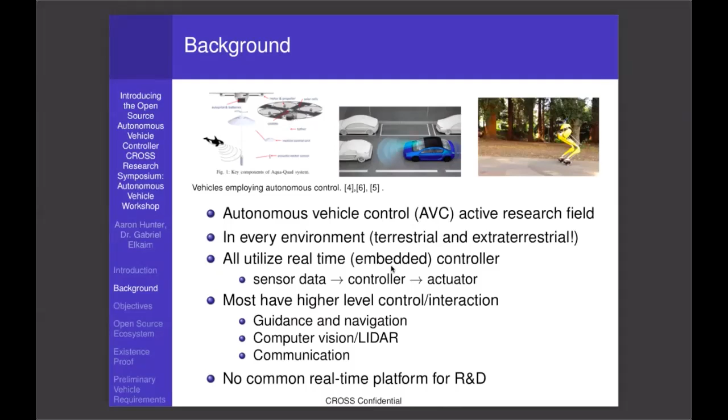So the proposal, therefore, is that we want to develop an open source, real-time embedded controller for autonomous vehicle research and development. In particular, we want this controller to be vehicle agnostic, that is, we want it to be useful for a larger number of vehicles than just a single class of vehicle, like an automobile or a quadcopter, but one that can be applicable to almost any real-time autonomous vehicle.

And equally important, this controller will automate the data pipeline to allow seamless integration to a single or multiple external processors, enabling those computationally expensive operations I just discussed, such as computer vision, guidance, navigation, model predictive control, you name it.

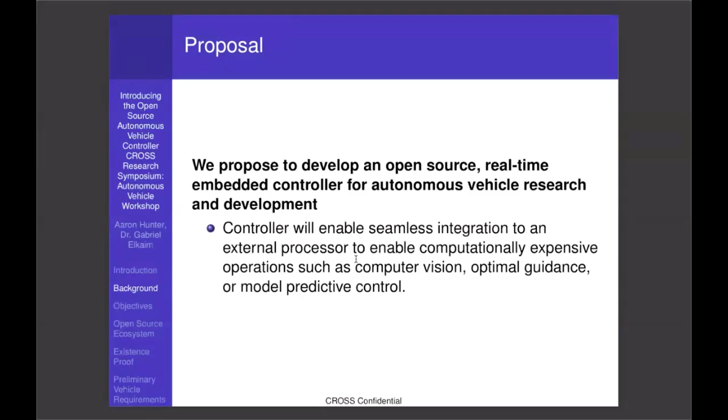We have several objectives for this project, starting with simply defining specifications for this vehicle agnostic vehicle controller. We will develop an embedded hardware architecture and a corresponding modular firmware based on that hardware, both of which will use embedded programming and embedded hardware best practices.

To demonstrate its value, we need to implement it on some vehicle ourselves, so we plan to implement it onto a scaled automotive platform. We also intend to demonstrate the advantage of having that higher level control performing some more advanced computation, so we will demonstrate optimal control with obstacle avoidance or something like that on the vehicle. And then, of course, we need to publish our results for both the controller design, hardware and firmware, and we want to publish the results of the actual vehicle testing once we've completed that testing.

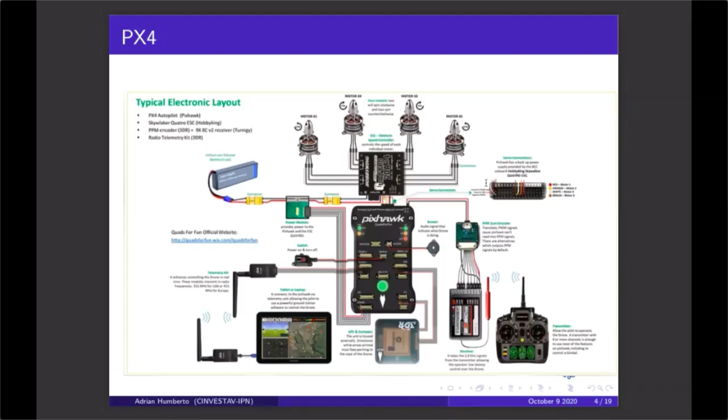Now I would like to talk to you about the robot operating system, ROS. ROS is a flexible framework for writing robot software. It is a collection of tools, libraries, and conventions that aim to simplify the task of creating complex and robust robot behavior across a wide variety of robotic platforms.

Why? Because creating truly general purpose robot software is hard. From the robot's perspective, problems that seem trivial to humans often vary widely between instances of tasks and environments. Dealing with this variation is so hard that no single individual, laboratory, or institution can hope to do it on their own.

As a result, ROS was built from the ground up to encourage collaborative robotics software development. For example, one laboratory might have experts in mapping indoor environments and could contribute a world-class system for producing maps. Another group might have experts in using maps to navigate, and yet another group might have discovered a computer vision approach that works well for recognizing small objects in clutter. ROS was designed specifically for groups like this to collaborate and build upon each other's work.

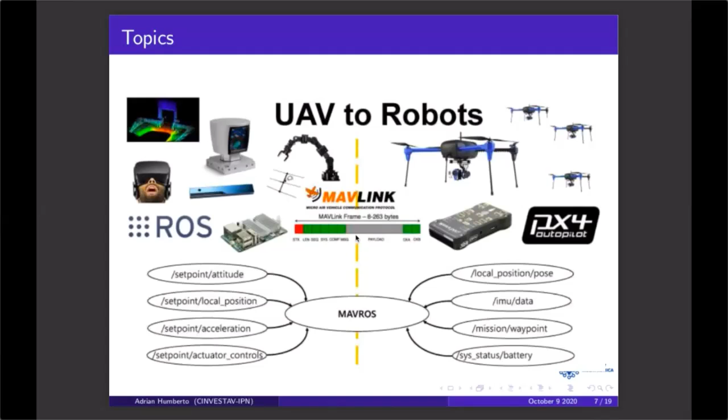The MAVROS package enables MAVLink, extendable communication between computers running ROS. MAVLink enables autopilot, and MAVLink enables ground control station, if we remember that MAVLink is a communication protocol between aerial robots and ground station, in this case, the ground control station.

So in concrete, we are interested in controlling the vehicles through these possible inputs: the position set points, the velocity set points, and the acceleration set points normalized thrust vector. The node that executes these messages runs the application on the companion computer and then controls the vehicle from the companion computer with the flight control in offboard mode.

For the quadrotor, the particular messages we can handle are geometry messages, pose-stamped, where you can give a position according to the inertial frame. In this case, the point that the GPS registered where the vehicle was turned on. Also, with geometry messages twist, it's possible to control the vehicle through the linear velocity according to the inertial frame.

On the other hand, with the MAVROS messages attitude target, you can control the vehicle through the orientation angles given in the notation of quaternions. And finally, the MAVROS messages attitude target can also control the altitude through the thrust normalization vector.

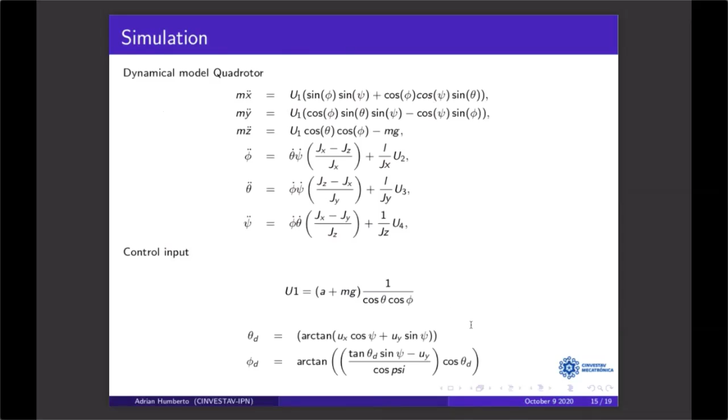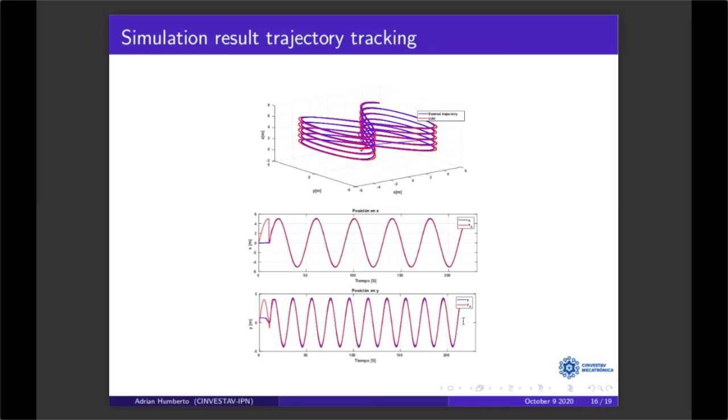So now I would like to show you a couple videos where we run the simulation using the ground control station and the Gazebo environment.

In this video, we test our application where we programmed the control laws. Offboard flight mode. Armed. And now start the trajectory tracking algorithm, running the offboard node.

We can see the ground control station. We receive the messages of the position of the vehicle.

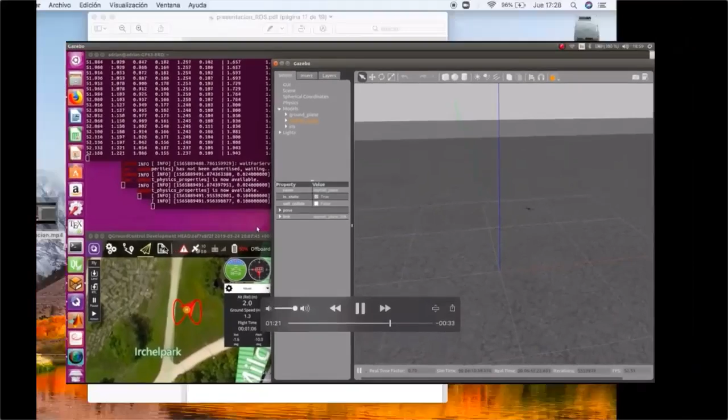And in the second video, we test the real platform built in the laboratory with the autopilot Pixhawk. This vehicle is only controlled through the companion computer where ROS is running, and all the nodes include our application. The experiment only consists of sending messages through the pose-stamped position topic, given a fixed coordinate in space with respect to the frame of reference fixed in the Earth.

In the video I show you that I don't use the radio control. The vehicle is only controlled with ROS through the radio frequency telemetry.

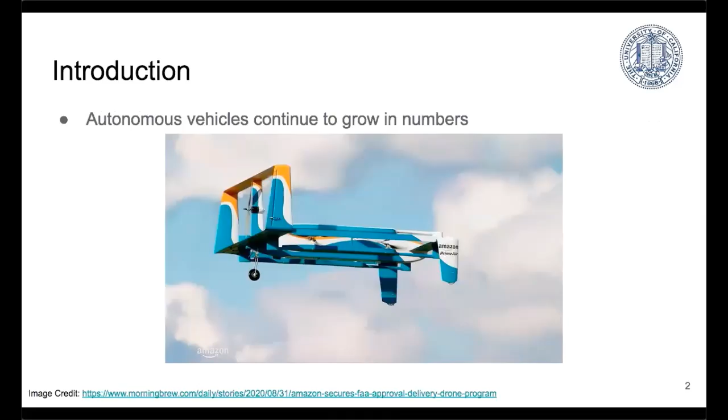A brief introduction: we're seeing more and more cases of autonomous vehicles in daily life. Recently, the FAA approved Amazon to use drones to deliver packages to customers. These kinds of vehicles have a lot of things to consider when designing and building them: fabrication, manufacturing, system integration. What kind of sensors do we need? What kind of actuators? Are we using a computer or something smaller like a microcontroller? What are the power systems doing, how are they designed? Then from a theoretical standpoint, we have to model that autonomous vehicle, the physical nature of that system, and describe it mathematically. That might not necessarily be a vehicle at all—it could be a different kind of robot, a robot arm, a satellite. It varies a lot. But in addition to modeling these systems, we have to be able to control them, and there's a whole branch of study into what kind of control we can use.

Commonplace, we see the PID controller, but more advanced controllers exist, such as optimized full state feedback and various other controllers. But part of designing an autonomous vehicle or robot or a system that needs to operate in three-dimensional space and navigate is we have to be able to estimate the attitude and the orientation of that vehicle or system.

So I'll be talking about attitude, heading, and reference systems, and how can we make sure that they're working? How do we validate that they're working? I'll be referring to that system as an AHRS for short.

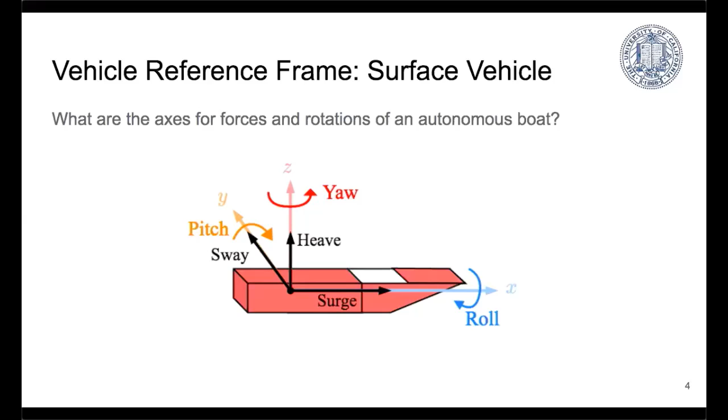You'll notice that if you've seen vehicle reference frames like this before, for different vehicles, the reference frame is sometimes flipped or has a different orientation. Sometimes, usually for aircraft, the z-axis is pointing down. But you still have yaw, pitch, roll for all of these vehicles.

So when we are measuring the rotation about these axes, we want to find our Euler angles with respect to the inertial reference frame and the vehicle reference frame. Generally we use something like an IMU, or in this case, it's a sensor head. And we have to be able to calibrate the measurements that this sensor head gives us.

Now, it gets a little complicated because some of the sensors, such as the magnetometer, might have a different orientation for its frame, where the x-axis is pointed opposite, or the whole frame is flipped, and that's something that you have to account for.

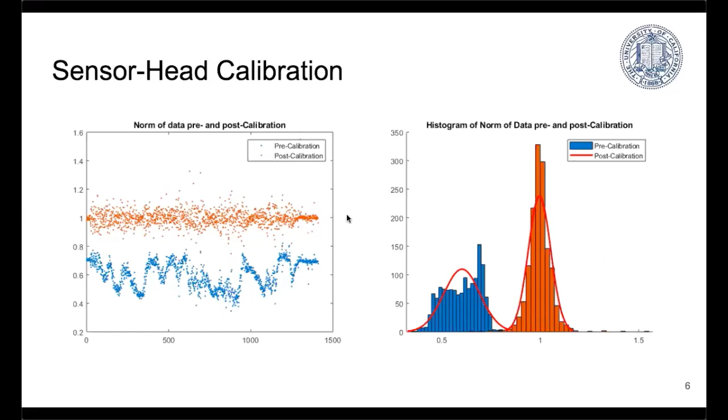Now, this histogram on the right shows how we are moving the number of data points from being offset by some amount in X, Y, Z, and this is the norm of that three-dimensional vector composed of those three elements, and we are able to shift it so that most of the data points are now on that sphere. So this is one of the steps you have to do in order to calibrate your sensor.

But once you have it calibrated, you have to have a system to determine your attitude and orientation. We have a problem intrinsic to gyroscopes: unless you have extremely expensive gyroscopes, and even then, they're going to drift. Usually it's a function of temperature, but it's also inherent to finding our Euler angles—when we integrate our gyro rates, we accumulate error because we don't have infinitely fast sampling time. So we have to correct that gyro drift. If they didn't drift, in an ideal world, we'd be able to integrate them and obtain exactly our rotation with respect to the inertial reference frame.

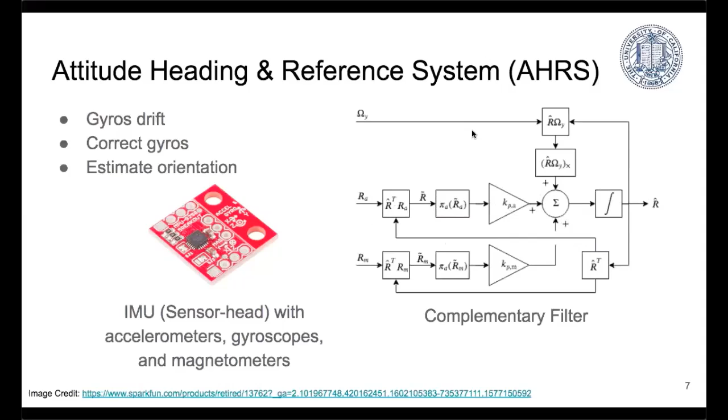So there's a bit more math to it. When we do this integration, we can do it a couple different ways, but one of the most effective is the Rodrigues exponential integration, shown here as a three-term Taylor expansion approximation. Here we have the anti-symmetric projection operator. We find the difference between what our sensors measured for the rotation and what our estimate was, and we project that difference, in the form of a matrix, onto our rotational rates, formatted as a skew symmetric matrix.

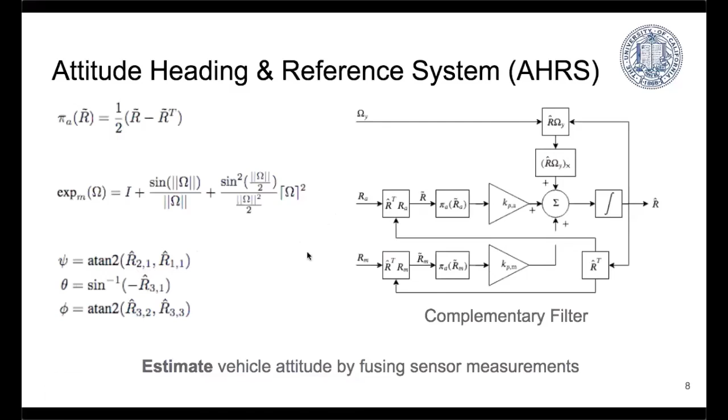Once we have this matrix and we've done all this math, we can extract our Euler angles—yaw, pitch, and roll. Now notice here I've indexed these by 1 through 3, but depending on your code formatting, this is sometimes indexed from 0 to 2. The point of all this is that this complementary filter is used to estimate the vehicle attitude, and part of that is extracting those angles.

So once we apply our complementary filter, or perhaps a different one such as a Kalman filter, we have to validate that AHRS. The complementary filter is part of the AHRS along with the IMU sensor head, and we have to make sure it's actually working. So we could compare angular rates, or we could compare the angles themselves, the Euler angles.

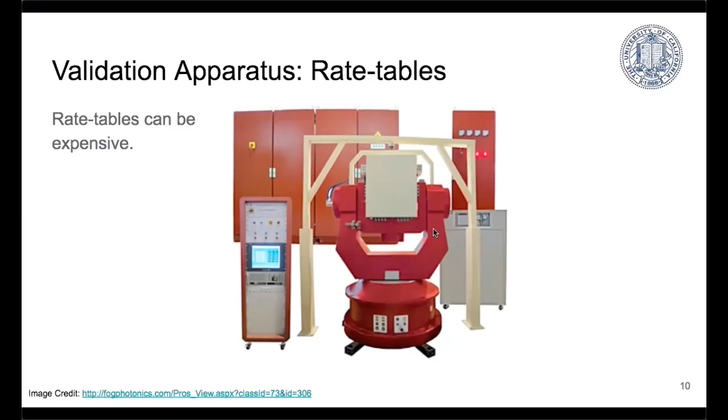If you have a lot of money, you're able to do this using a rate table. You can compare on each axis—rotate a very large, very well-machined gimbal so you can have your yaw, your pitch, and your roll, and find those rates directly with external sensors in this gimbal and compare them to what your AHRS is doing. Ideally, the difference is zero. Ideally, they are the same.

So what I worked on was a validation apparatus that didn't cost as much money, but could still be useful for smaller projects that require developing your own AHRS.

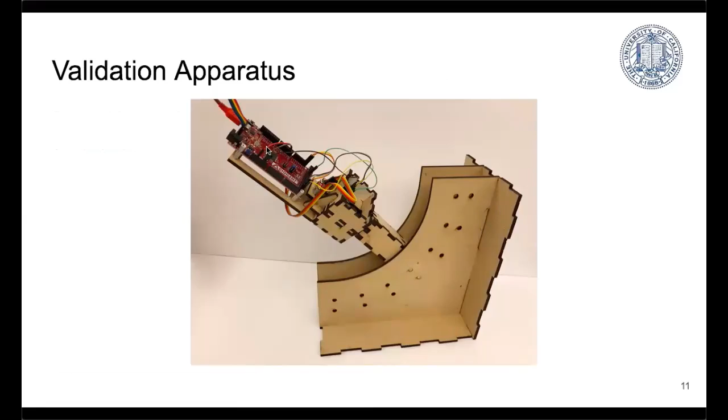So here we have a laser cut MDF frame that's holding an IMU, an encoder, and a microcontroller. What's happening is we're able to measure, within just a single axis, the roll angle, and we can measure that with the encoder and compare it to the IMU sensor head and the onboard AHRS.

And this doesn't necessarily have to be onboard—you could also collect all this data and process it offline too. But we can also rotate the sensor head mount so we can vary the contribution of these external aiding vectors, which can include gravity or the magnetic field in this case. Now for satellites, they can use the sun as an external aiding vector, but that's a whole different story—we can talk about that after the presentation.

Notice here that there are a couple different ways we could orient the IMU. We could actually test for the yaw angle, or we could test for the pitch angle. This can be detached and then placed back on in a different orientation to isolate that axis of rotation.

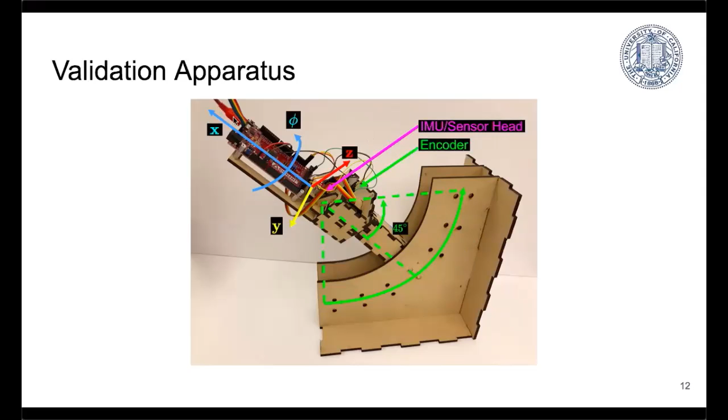And that is a good indication that your AHRS is working. If you were oriented at 90 degrees with your roll axis and you saw that gravity was contributing, then you might have a problem with your calculations.

So another test we did after applying this apparatus and tuning our complementary filter is we put the system—the IMU, the microcontroller, and the GPS—on a small remote control boat, and we took some GPS data.

One of the measurements that GPS data can give you is called the course over ground angle, or COG. That is the direction you are going, the angle of that direction with respect to a local tangent plane. This is a very useful measurement because we could compare it with the yaw angle over time from the complementary filter.

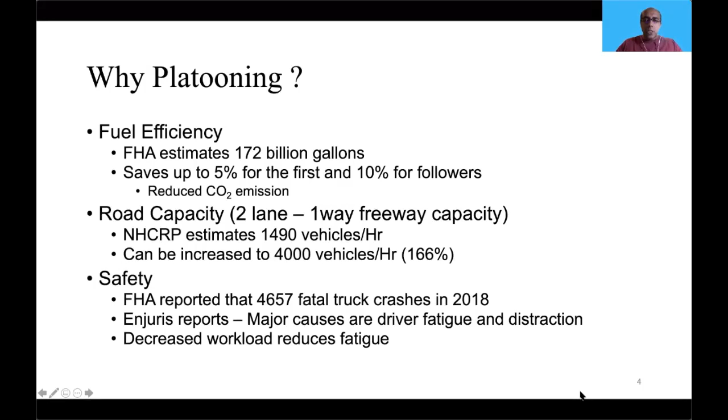Coming to automation, the Society of Automotive Engineers have defined 6 levels of automation, 0 being the least, 5 being the highest. For autonomous platooning, we need at least level 4 automation, wherein the human drivers will relinquish their control when they are joining the platoon, and once the vehicle is in the platoon, it is autonomous.

Platooning can happen either on freeways or in cities. When dealing with city roads, there is an additional challenge because of the traffic signals and traffic rules. For that, the vehicles have to constantly communicate, and there is a higher level of interaction with the infrastructure. So in this work, we focus on freeways.

The platoons can happen either as an offline process, at the entrance of the freeways, or autonomously during the trip itself. If it happens autonomously during the trip, then it has to support some of the basic maneuvers, such as joining the platoon, exiting from the platoon, changing lanes, or splitting the platoon, and also merging of platoons when the lanes merge too.

Depending upon where these maneuvers happen, it can be classified as either centralized or decentralized, or in decentralized, it can be deliberate or emergent. We'll go into a little bit of detail about these in the forthcoming slides.

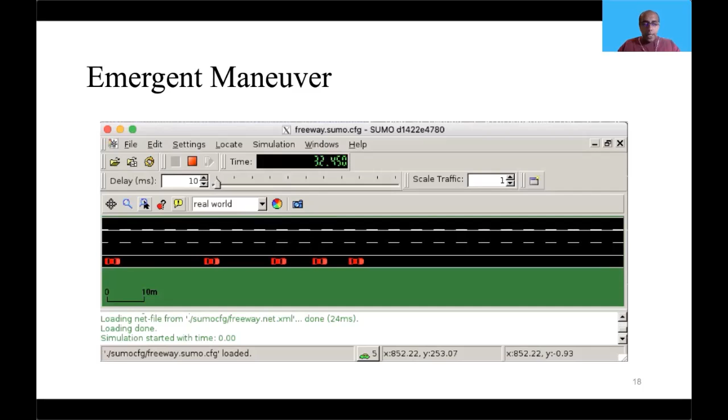Once all 5 vehicles are in the platoon, the exit maneuver is instantaneous because it doesn't have to communicate with any vehicles, and immediately they all change their lanes. This happens at around 45 seconds, which is much faster compared to the centralized system, right? So it's almost time.

Now we can see we will not even notice the vehicles turning blue. They all changed, and now the vehicles have exited. Because there was a decrease in pheromone value, the last vehicle caught up with the first vehicle. So we have an emergent behavior which emerged from local interaction.

These are our preliminary results, where we see in a centralized system, I need to talk about the backoff. Whenever the leader rejects a request from one of the vehicles, the vehicle will actually do a backoff, waiting for a random amount of time before it can retry.